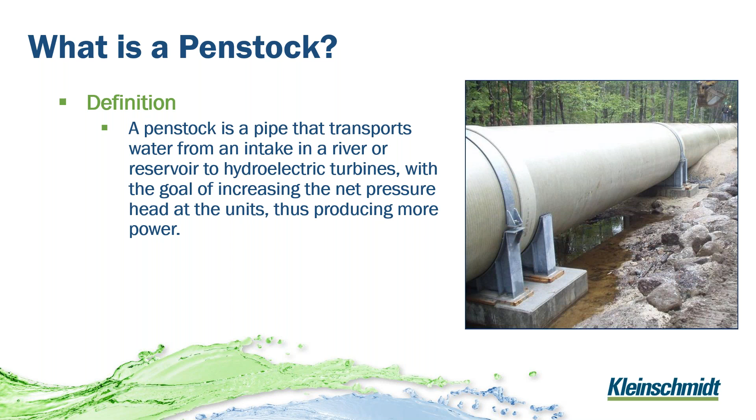So we're here to talk about penstocks, right? Hydro plant owners nowadays have numerous financial, operational, and safety issues to deal with every day. It requires continually assessing what's critical for that day, and what's most important to keep that facility running smoothly and profitable for today and into the future.

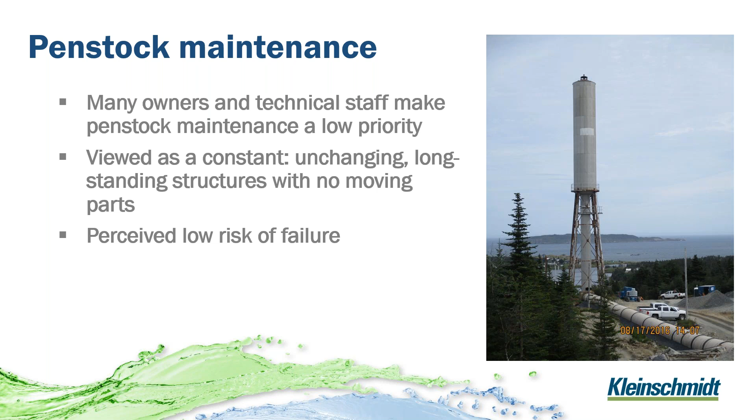What's important to think about, though, is penstocks are kind of viewed, from what I've seen, as a constant. They're unchanging, long standing structures, no moving parts. They're just there getting the water from the dam down to the powerhouse, and then we think of them as having a low risk of failure or having less of an impact on the structure, on the plant and facility.

The issue there is that many penstocks are getting into or beyond their length of service life or their design life, right? We're also asking a lot of these structures. We've potentially changed as the industry changes and the needs for different generation assets change. We're putting higher demands on the penstocks, potentially having more starts and stops, more unit trips, pushing the pressures into the penstocks maybe a little bit higher than they were designed for, which makes it even more important to understand the condition of our penstocks.

On the other side of that, we're typically seeing less regular physical inspections, so operators aren't as commonly going out daily, weekly, looking at them. We're trying to replace some inspections with remote monitoring, and that remote monitoring, from what I've seen, is typically looking at flows and pressures and trying to detect an issue as it's happening, saying is it a safety concern and whether we need to do something about it right then. But that doesn't always address or detect deterioration in the penstock.

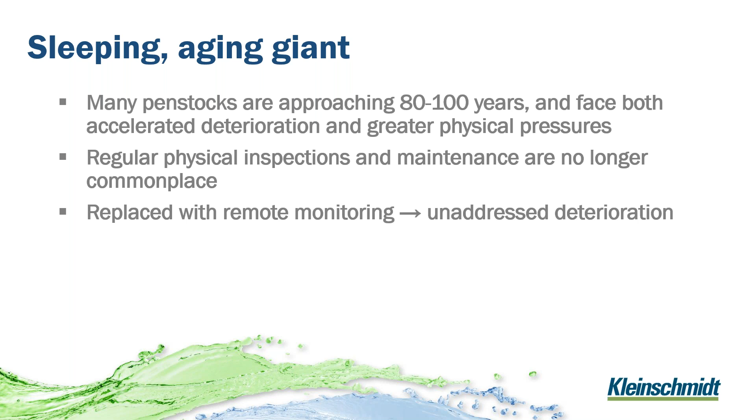So what we're thinking about and advocating for is trying to be a little less reactive, trying to detect that deterioration ahead of time instead of detecting a problem as it's happening. We see that this can improve long-term reliability and safety of the structures.

Resulting in cost-effective use of our facilities, because the penstock is a vital part of our hydro plants. And trying to extend the service life of our structure. The longer we can maintain a cost-effective penstock, the overall cost effectiveness of our plant and cost of energy is going to go down. So we support having a penstock safety program, which can extend that service life and maintain a safe and reliable penstock.

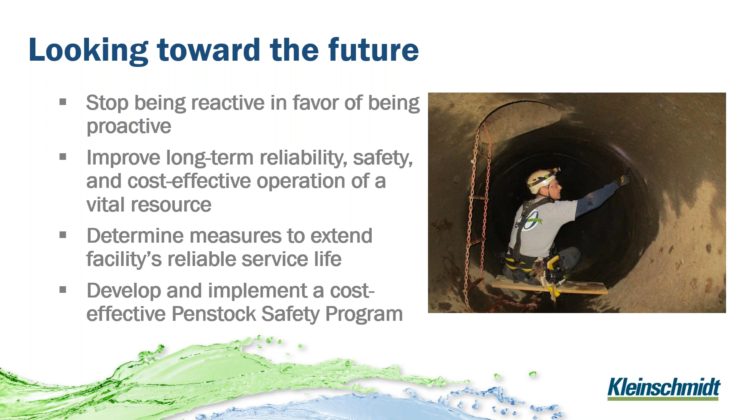So back in the day when these penstocks were initially built, the stations were likely manned with an operator there 5 to 6 days a week. As Keenan mentioned, they were doing visual inspections of their penstock system on a regular basis, possibly weekly, able to easily get out there after a seismic event, a windstorm, or some other change in weather that could impact their pipe. They were looking at coatings, and with their wood stave pipe, they were looking at the condition of the wood. They were able to see a lot.

Now, in today's world, stations aren't always manned. Some still are. A lot of times they're controlled from a central location with an operator assigned to the station, but the operator has multiple projects they're responsible for, and therefore they might spend a day at the site each week, maybe a little more, maybe a little less. This gives them less time to just see things and understand what's going on. So some stuff can be missed, and issues can remain unidentified until they become significant and sometimes result in a failure.

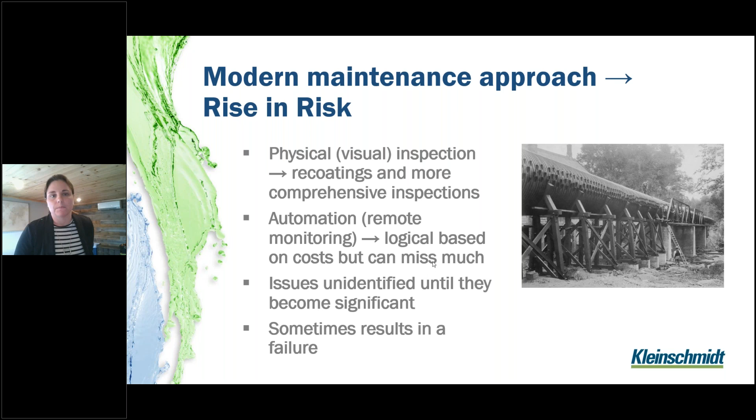So what might this remote monitoring miss? Remember, remote monitoring is usually some sort of pressure sensors or flow sensors within the system, and so you're just looking for changes. If those changes are occurring, you already have a substantial leak, or maybe even have lost your penstock.

Some stuff that's missed is overstressing and buckling of your penstock, especially at the saddle support, foundation failures, minor damage caused by earthquakes, trees falling on your penstock. If you're on a cliff edge or mountainside, you could have rocks. And then there's the subtle signs of surface deterioration you can see from the outside. Wood stave penstocks, you're looking for corroded wood staves and bands. Steel, you're looking for paint missing, pitting developing, rusting. Fiberglass reinforced penstock, or FRP, you're looking for delamination.

And then there's the internal issues that you can't see unless you dewater your penstock and go in and take a look. You're looking for the same surface defects you'd spot from the exterior. But your exterior could look fine while your interior looks really terrible, and if it's buried, you're not seeing it at all unless you go in there.

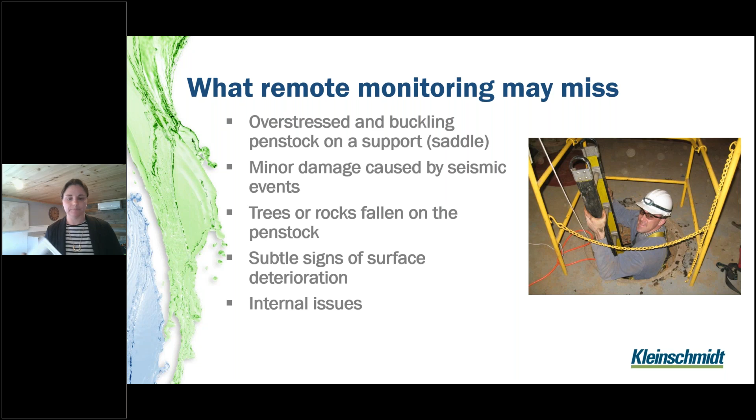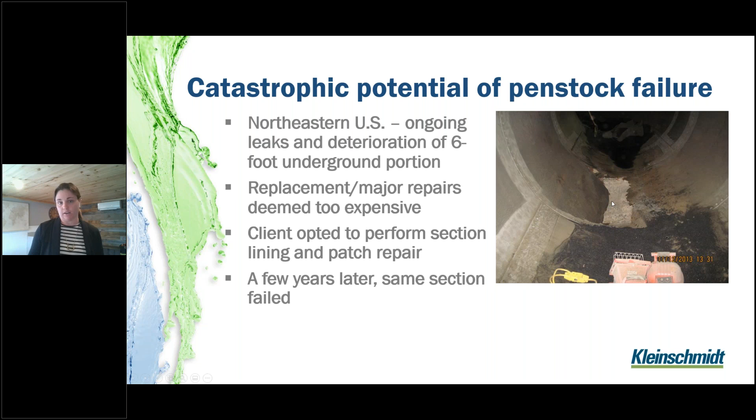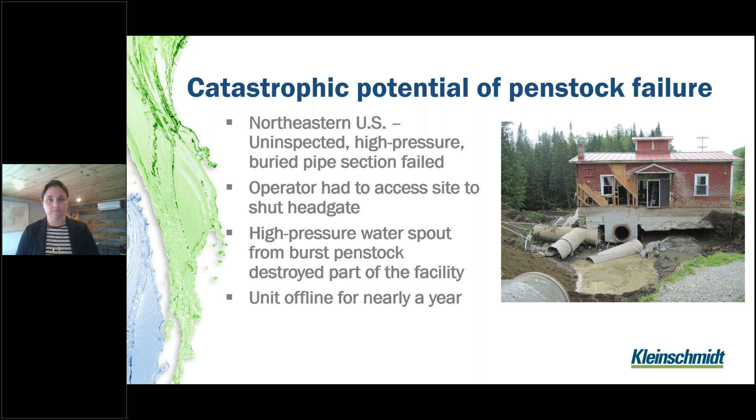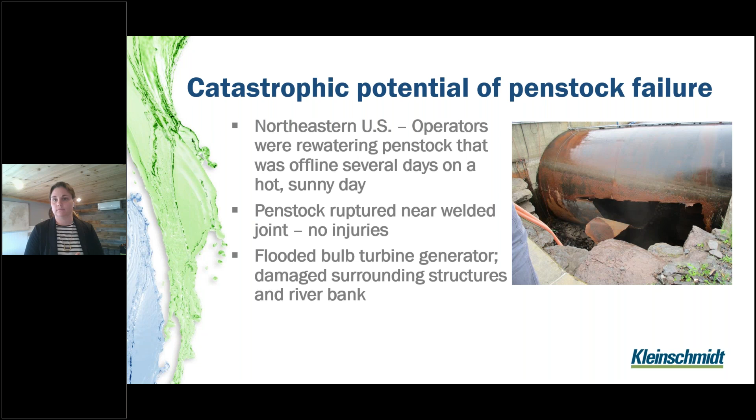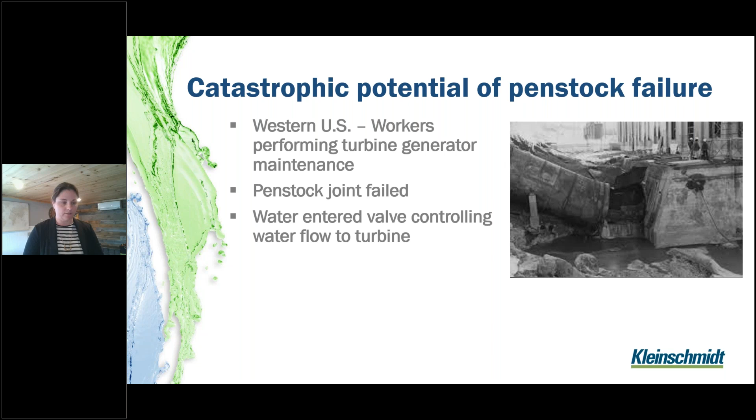This one is an older one, not a Kleinschmidt related project, but penstock joints failed due to lack of maintenance and inspection. Water entered the valve building, which is what you see here. And if you go to the next slide, you can see an outside view. Essentially over 3,000 CFS of water was coming through this pipe.

It damaged the powerhouse, as you can see, very similar to that colored photo I showed earlier, where it took off the side, damaged the parking lot, the maintenance shop, and 5 workers were swept into the river and 4 of them drowned. So this was when there were a lot of people around because they were doing work.

If a station's unmanned, you might not have any risk of life, but it can take even longer to get there and shut your head gate and react to something like this. So what we want to advocate through this presentation and our paper is trying to get a more proactive approach instead of a reactive approach. That can save a lot of time for downtime. It can possibly save a lot of cost in terms of outage duration and costly replacements if you're just doing maintenance and repairs going through a systematic approach.

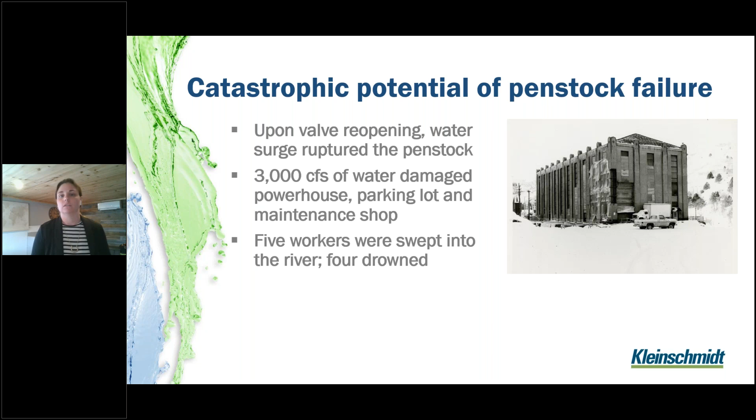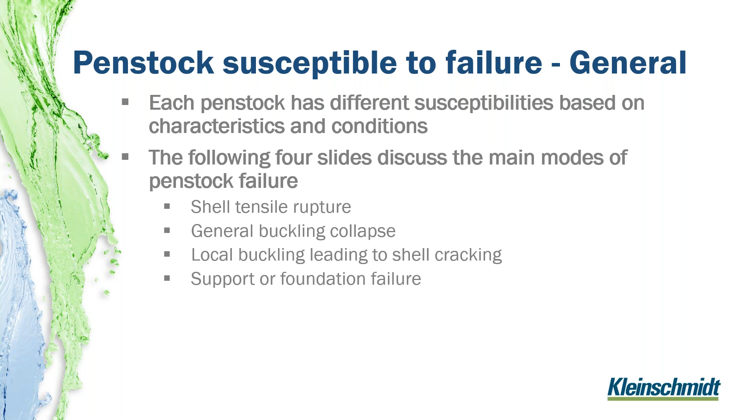Thinking about penstock failures a bit more and having a systematic approach, we want to think about the four main modes of failure for our penstocks. They include shell tensile rupture, general buckling collapse, local buckling that would lead to shell cracking, and then numerous types of support or foundation failure. We'll talk about those in a little more detail.

So shell tensile rupture, as you see a few examples here. We think about this as high internal pressures that create excessive hoop stresses, and then we have tensile rupture in either the shell base material or in the longitudinal joints, whether they be riveted, welded, even bolted. So you'll see a couple of examples on the top right where the shell material, the base material, failed.

On the bottom left, you see a welded joint that failed. That one was kind of poor weld quality from our research. But general corrosion and pitting can also cause tensile rupture of the shell and the base material. You'll see kind of uniform pitting on the bottom picture on the interior of that steel penstock, and then similar on the right side, you have some localized bands of pitting that could cause failure at that location.

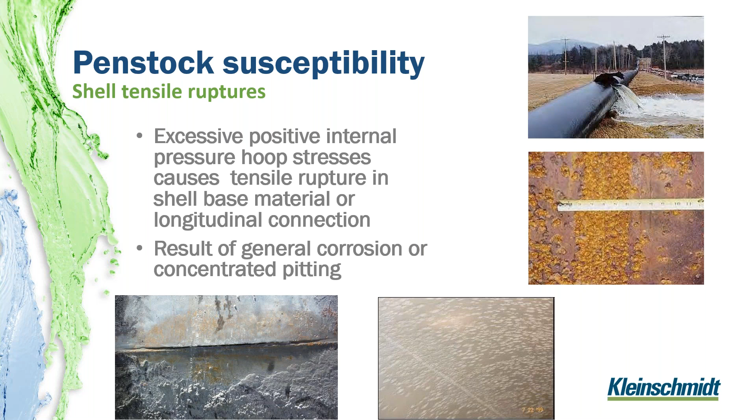A good picture here of a global general buckling collapse. This failure mode generally occurs for above ground penstocks with potential vacuum pressures on the interior. Could be caused by vents or inadequate venting due to potential ice buildup or valves not providing that vacuum break, or if they're inoperable. Buried penstocks can have similar failures, typically caused by higher than normal groundwater table elevations, higher surcharge loads, as well as just deterioration of the penstock.

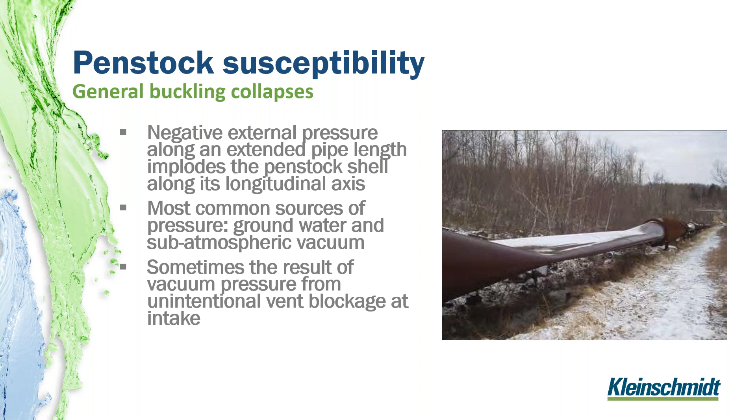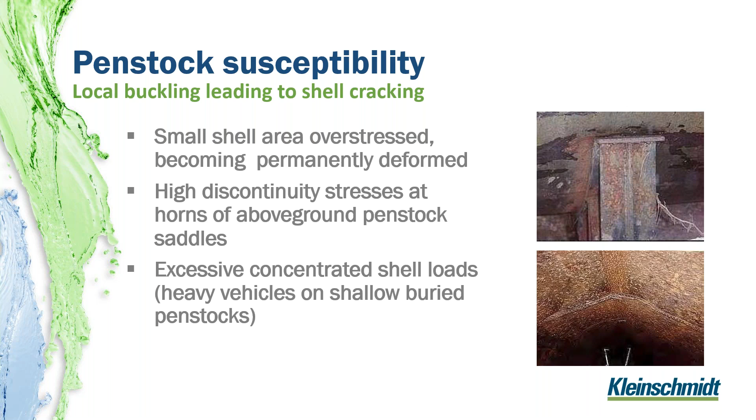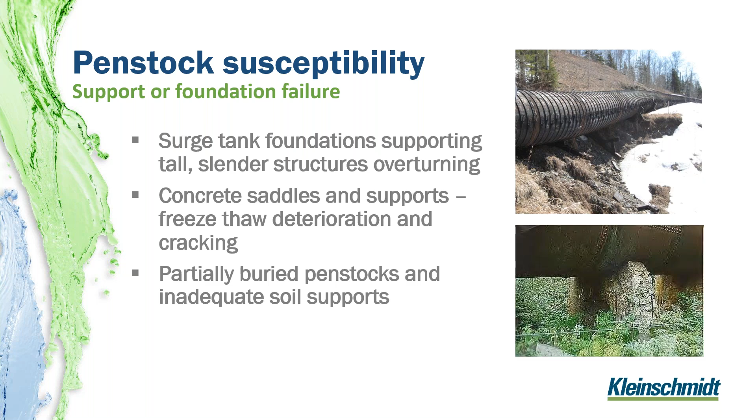So again, kind of wrapping that back in, thinking about these failure modes, they go into a Penstock safety program, trying to create a proactive approach to taking care of our structures. This safety program is site-specific, structure-specific. We look at the site, the potential failure modes of this Penstock, which one is more likely, how much deterioration do we have at this point, and what do we need to look at going forward, and how do we do that?

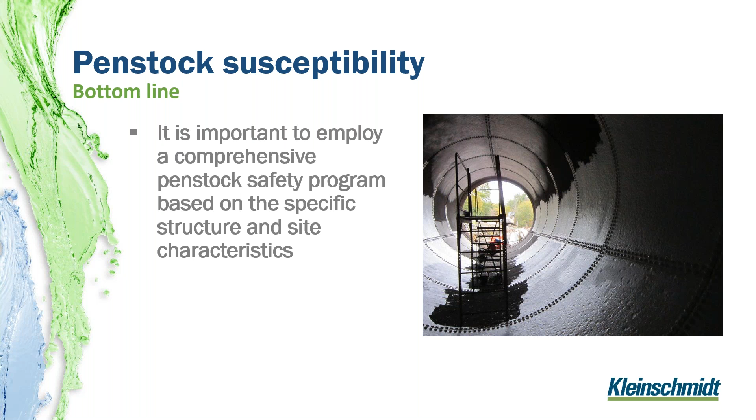So let's talk about some best practices for establishing, starting, and then carrying out that Penstock safety program. The first step is to establish those baseline conditions, including your primary risk and safety factors. This is an analysis of your Penstock, because likely they were designed 50, 80, or 100 years ago to different standards. So where are they by today's standards?

How thin is that steel? What type of laminates do we have in our FRP pipe that was installed 40 years ago? We're looking to collect that type of information and then run an analysis to establish what our current factor of safety is. Is it a 2.0? Is it a 1.5? Are we down at a 1.1? Based on those safety factors, we want to establish action levels, like when certain maintenance should be done as your Penstock starts to deteriorate, or threshold levels where we need to completely repair or replace this Penstock if we get past a certain point.

Once we know that baseline, we move on to creating an inspection and monitoring program, and a way to consistently document those key metrics and the primary risk of your Penstock. We need to know how often we want to inspect it, what type of inspections need to be done, and if it's steel, it's good to take those UT thickness readings in consistent locations so you can compare data from one year to the next, because your steel doesn't necessarily thin at exactly the same rate, so you don't want to be taking readings in completely different places every 10 years because you won't be able to compare those numbers as well.

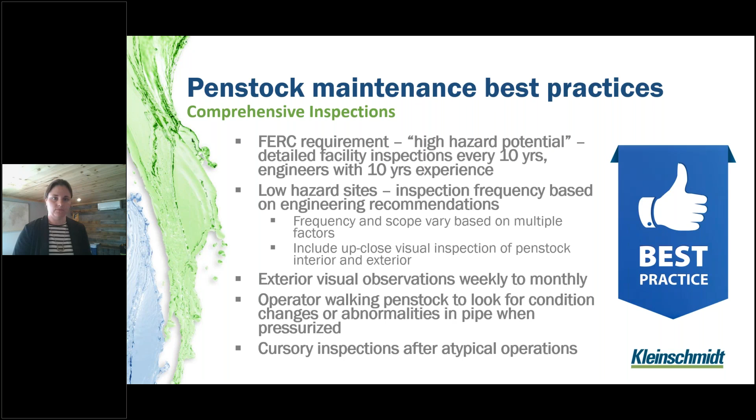I'm going to talk about a few common myths about penstocks in general. Common myth number one: Penstock inspections are simple and straightforward.

I've been involved with many comprehensive inspections that are fairly complex, and all inspections require some level of planning. Penstock inspections, typically if we're getting on the interior, are going to require confined space entry, where you need the inspection team, but also support teams that you need to plan for. Obviously we're planning for the safety of the inspection team and how to perform the inspection safely. We're going to talk about access and what we're going to measure and what the goals of the inspection are, and communicate that with the site owner or operator, so we're making sure our expectations of the inspection are in line with each other.

Other parts of the inspection that could make it complex involve many types of advanced technologies being used. Typically for steel penstock, we're using ultrasonics to measure steel thickness. Other NDT methods can be used as well, including ground penetrating radar. LiDAR can be used to look at geometries. And we could use other remote operated vehicles where it's harder to get engineers or inspectors into certain areas, including underwater inspection techniques and technology.

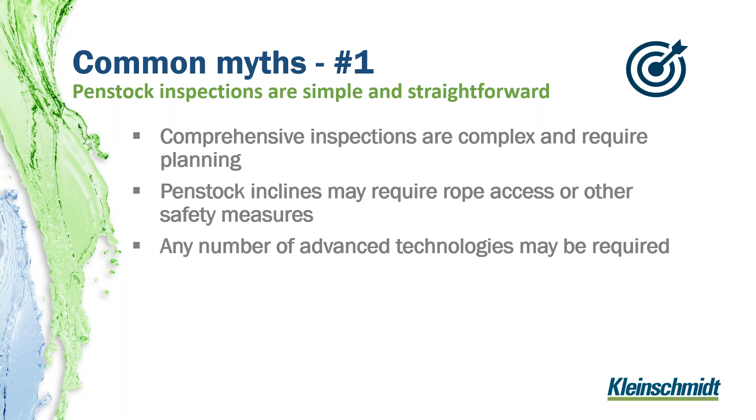So like I said, we should have a plan for all inspections. We call that our inspection and safety plan. Sometimes those can be separate documents. But we talk about safety as in how we're going to access the site, who's going to be accessing for the inspection, what they're going to be doing, who they're going to be supported by, and what other safety measures need to be in place to make that work.

The inspection plan is going to talk about what the goals of the inspection are, what we're anticipating for measurements, what kind of data we're going to collect, and how we're going to use that in the future, making sure that we're in line with the expectations for the owner as well as the inspection team. We also talk about communication and how the actual inspection is going to take place. Overall, the goal is to identify issues ahead of time, and make sure we have a way to deal with any issues that could arise, creating a cost-effective, ideally safe inspection that can detect any problems we anticipate coming through.

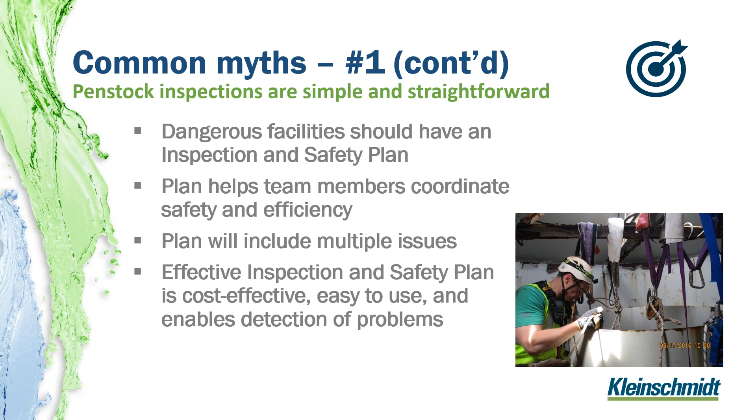Common myth number 2 is that exterior inspections are enough to identify key issues, especially if your penstock is exposed along its full length. While it is true that external inspections can identify a lot of key issues—you can see your foundations, you can see your exterior coating, you can look at expansion joints and see if they're allowing for that temperature movement—the fact is that the interior always looks much different than the exterior. The exterior typically gets more maintenance, gets repainted more frequently, and isn't subject to continuous water coming through with silt and debris that could be somewhat corrosive to the interior.

So you really do want to, in a detailed inspection, dewater, go in and take a look. You can see pitting, rusting, corrosion. On FRP, you might see delamination. Those saddle stresses, like the picture shown earlier of a steel penstock with stress and deformation around the horn—you might see deformation from the outside, but go inside and find that's actually causing some cracking that hasn't come out on the outside yet. So if you can, every so often, dewater your penstock and do a detailed inspection in there as well.

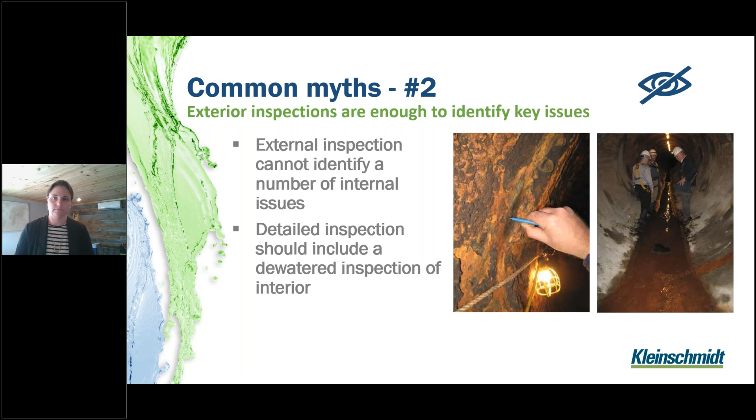Common myth number 3, expanding on what Jill just talked about: buried and exposed penstocks require similar methods. While we can do a lot of things on either side and get a lot of information, the inspection I would do for a buried penstock is going to be different than one that's elevated or above ground.

For example, an above ground steel penstock on saddles—I would spend a lot more of my time on the exterior where it's safer, I can see a lot, I can look at the coating, look at supports, take a lot of thickness measurements from the exterior and look at the shell thickness. But I'm also going to want to get back inside the penstock and look at surface corrosion potentially, coating condition on the inside, pitting, and rivets if it's a riveted penstock or welds.

Buried penstocks don't allow you to do that, where you're going to spend 90% of your time on the interior, taking all your measurements from the inside, kind of extrapolating the condition without seeing the exterior. But you get some signs of leakage potentially for buried penstocks by looking at saturated ground, especially if the penstock's been recently dewatered. So it can be slightly different looking at exposed versus buried penstocks.

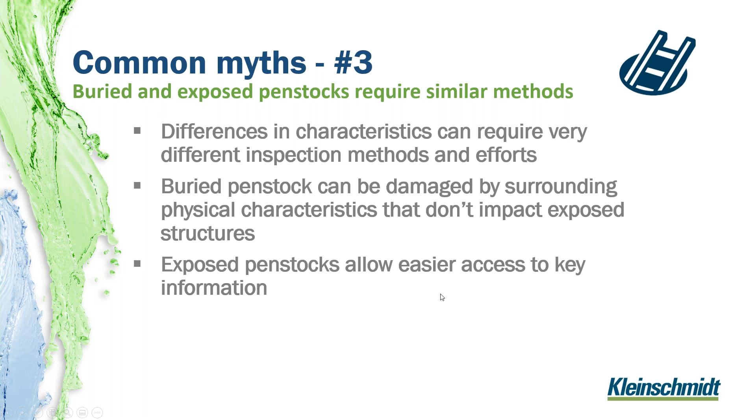Common myth number 4 is that inspection approaches are similar across all materials. You've heard both Keenan and I mention ultrasonic thickness readings for steel. That's a very common way to tell your steel thickness, but you're not going to take UT readings for concrete, fiberglass (FRP), high density polyethylene pipe (HDPE), or wood. You're only going to use that UT gauge really for your steel.

At concrete, you're looking more at visual inspections. Your baseline inspection is going to mean a lot of sketches of cracking and other deterioration and a lot of photos to document very specifically different locations where this is occurring, so that when you come back in 10 years or whatever your time frame is, you can see how long those cracks have grown, if they're widening. You're doing a lot of baseline visual comparison with concrete. You might use some penetrating radar scan of your concrete when you first do it to figure out rebar, wire mesh, and concrete thickness, especially on a buried pipe when establishing that baseline, but that's not something you'd need to do for subsequent inspections since that's not really going to change on a concrete pipe.

Wood, you might take some bores of the wood itself to see how soft the wood is, and if it's deteriorating, you can visually see deterioration really well. You're looking at your bands and how much corrosion they have, your saddles, and your foundations.

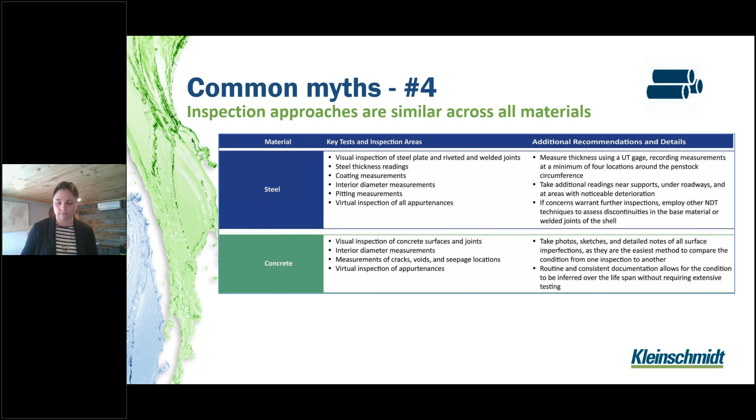Common myth number 5: repair is always more economical than replacement. Obviously, that's not always the case. Sometimes replacement is the more economical solution, as structures age and their cost of maintenance continues to rise, and at some point there's a tipping point. Part of that is understanding what our structure's condition is. We want to know where its limits are and what the actual condition is there. So if there's a pinhole in a steel structure, can I just repair it with a patch, welding a steel plate, or do I need to go and repair or replace the whole section of that steel penstock?

Obviously, that decision comes down to costs and how they start to ramp up, but replacement costs depend on location, material, and site-specific circumstances, including geological and geotechnical considerations, and other access considerations.

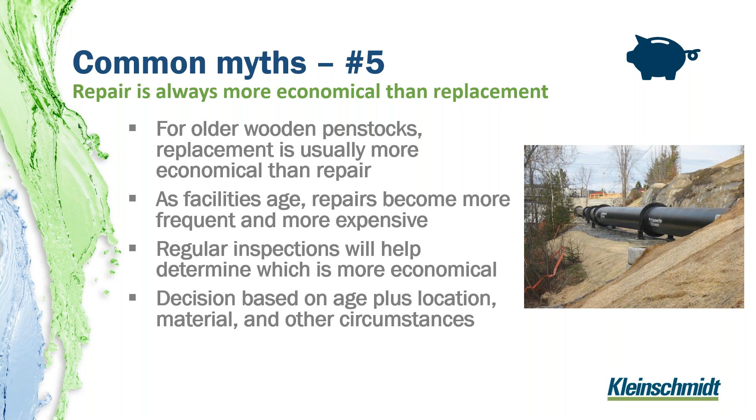With this forward-looking approach that we're advocating, it becomes very important that you have good design partners for both building your safety program, establishing your baseline, and then going forward with maintenance and repairs, and eventually down the road, replacement. This whole program that we hope you develop is only going to be as useful as the people helping you build it, both internally and externally, and also the professionals conducting it.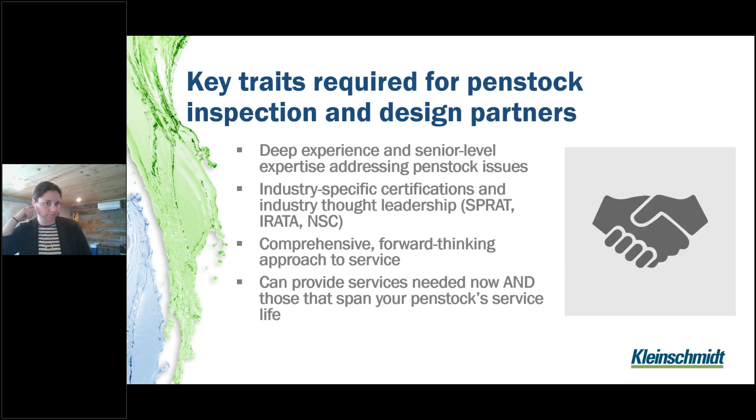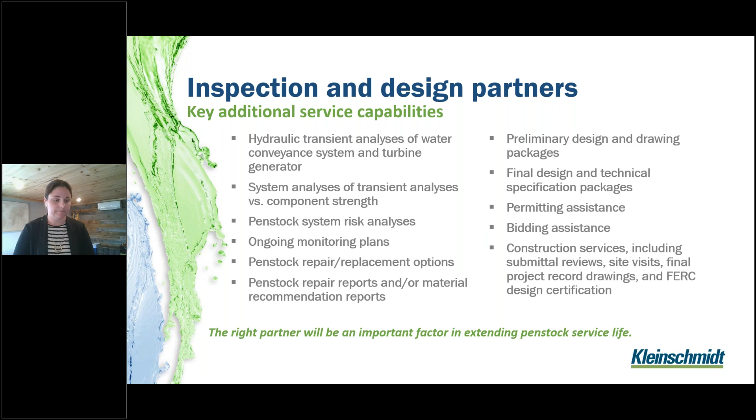So to wrap up, again, looking forward, if I was an owner or a manager, I want to ask myself, when was the last time I took stock of my penstock, right? What potential issues are out there that I may have overlooked? Are there things that I haven't prioritized or that aren't quite prioritized correctly. And also, are there things out there that I can do now that might limit or pull back on delays to operations? Can I limit excessive repair costs or try to prevent things that could potentially be worse?